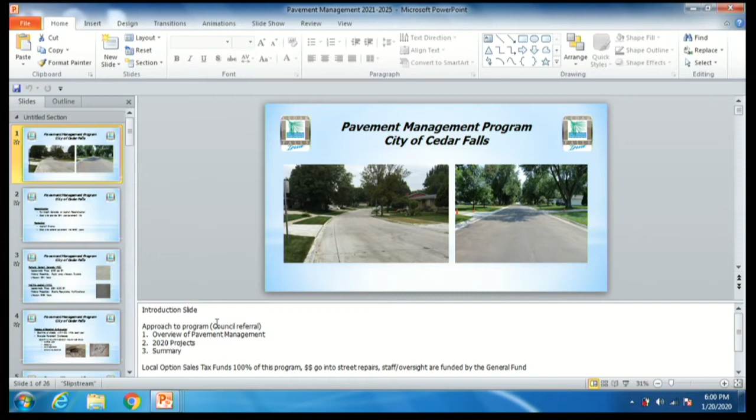I'm going to give a presentation on our city's pavement management program. I'll do the introduction, kind of a high-level overview of the program, and then later John's going to present more in detail our specific 2021 plan. So having said that, I'll jump right into it.

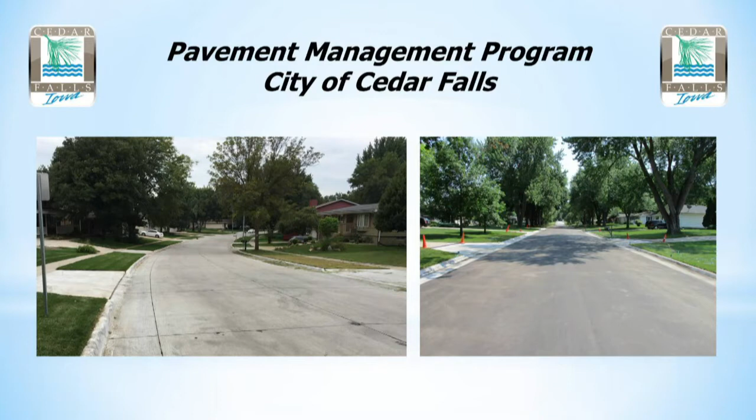Our pavement management program is a program that gets funded every year by our local option sales tax. So this is what our local option sales tax goes to: restoration of streets and complete street reconstruction. On that first slide, complete reconstruction means a complete reconstruction of either concrete pavement or complete asphalt pavement reconstruction.

We basically tear out the street due to age or deterioration. Most of these streets are in desperate need of major repair, and those will get a reconstruction of either concrete or asphalt, putting in a new pavement. That pavement design life is around 25 years for concrete, and for asphalt pavement it typically provides a new pavement life of between 15 and 20 years. The approximate cost per square yard for concrete pavement is around $130, and hot mix asphalt varies depending on the type of repair and the pavement section.

Let's see if I can advance this slide here onto the next.

That was the introductory slide, just the difference between reconstruction and restoration. A restoration is like a typical mill and overlay. We'll mill off the asphalt pavement and then overlay it with new asphalt, typically 3 inches, and that will extend the life of that existing pavement.

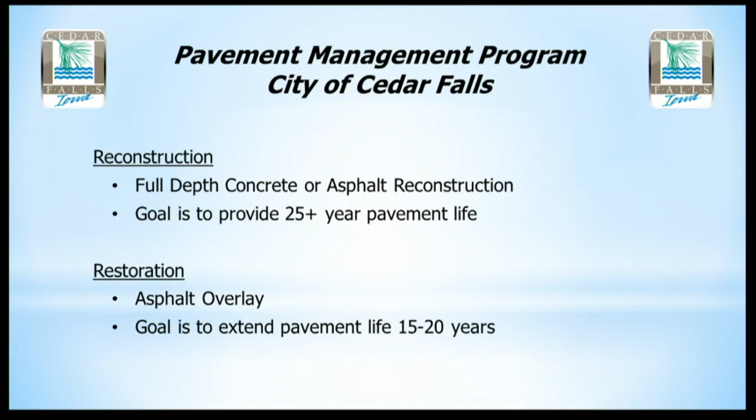We try to get 15 to 20 years out of that extended pavement life with a restoration project. The reconstruct is a new pavement, ripping out the existing pavement and putting in a new one, and hope to get 25 years of life out of that new pavement.

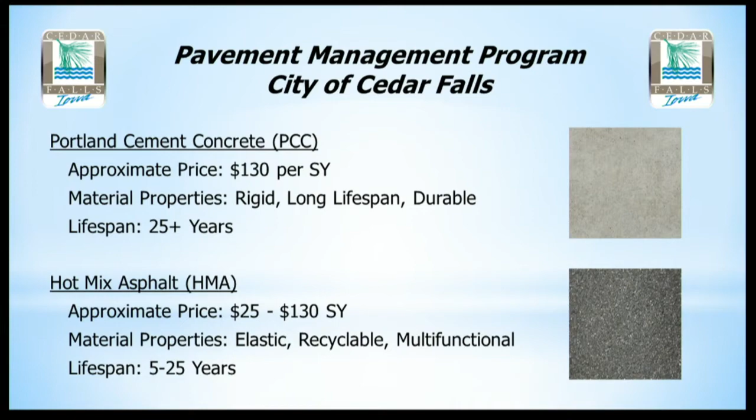I went through the cost, the difference between concrete pavement and asphalt pavement. So I'll jump into the next slide.

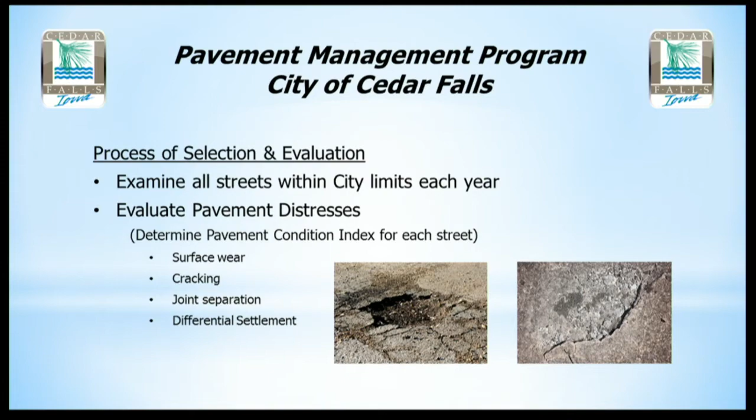Some of the things that we look for: every year staff goes out and drives the entire city, evaluates the pavements, and assigns a pavement condition index based on all the streets we drive. Then we prioritize rate of deterioration of these pavements and implement those based on critical needs. That's basically how we put it into our 5-year program. We put together a 5-year program based on our pavement evaluation, and we constantly update that every year because we go and drive the streets every year. It's a continuing process.

Some of the distresses that we typically see are fatigue cracking, wear, and busted panels in concrete pavement. Lots of times it could be anything underneath that pavement, maybe the subsoils are in poor shape, but there's a lot of reasons why over time pavement just wears out. It gets to the end of its design life, and we look at doing these types of repairs.

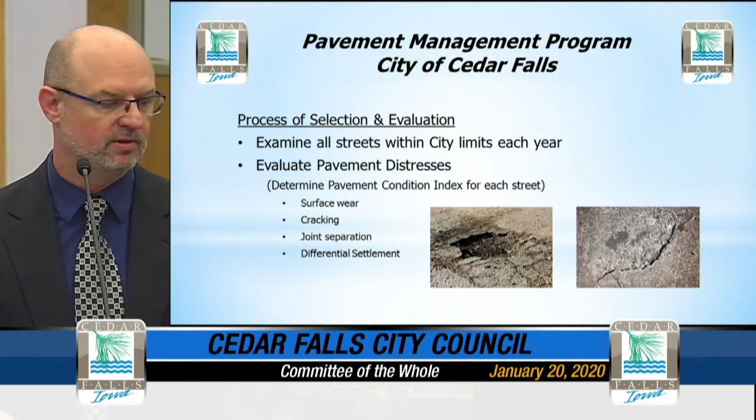Since 1991, when the local sales tax was implemented, we've done approximately 42 miles of street reconstruction, approximately 104 miles of restoration projects, and 4.2 miles of miscellaneous projects — perhaps some street intersection improvements and other things that wouldn't be a full street type of construction. So you can see since 1991 we've done a whole lot of projects, 150 miles worth of pavement improvement since the local sales option tax was implemented back in 1991.

So since 1991, we've gotten to the point now where we've almost come full circle. We've done a large portion of the streets in the city that needed either reconstruction or rehabilitation, and now we're getting back to that. We're at that 30-year mark, looking to go back and redo some of those streets again.

We do incorporate the Complete Streets program when we evaluate these streets. Part of that is we evaluate safety, trails, sidewalks, and other transportation use. These are all factors that we incorporate into our design when we put together the planning and design for these streets.

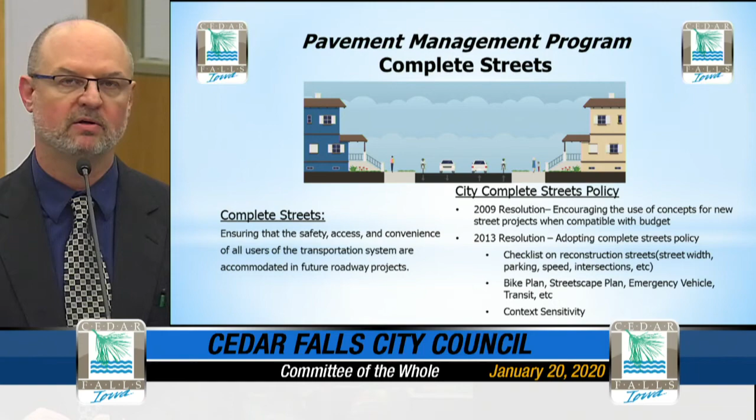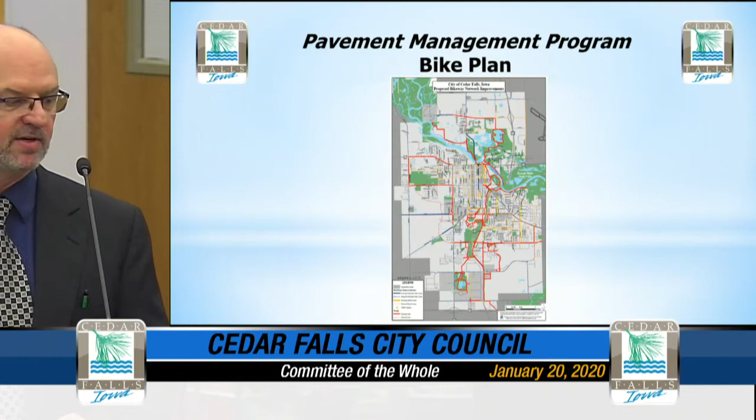That's a high-level general overview for our pavement management program, and John's going to get into more specifics for our 2021 plan, and then he'll touch on our ongoing 5-year plan. So with that, I will turn it over to John. Thank you for your time.

Thanks, Dave. So yeah, we'll move quickly through what is going to be the 2021 through 2025 plan. I'll spend a little more time on 2021, with 22 through 25 basically just listing off what is currently the intention to move forward on these streets. As Dave mentioned, we look at every street every year, and sometimes as we look 2, 3, 4 years out, those streets end up moving forward.

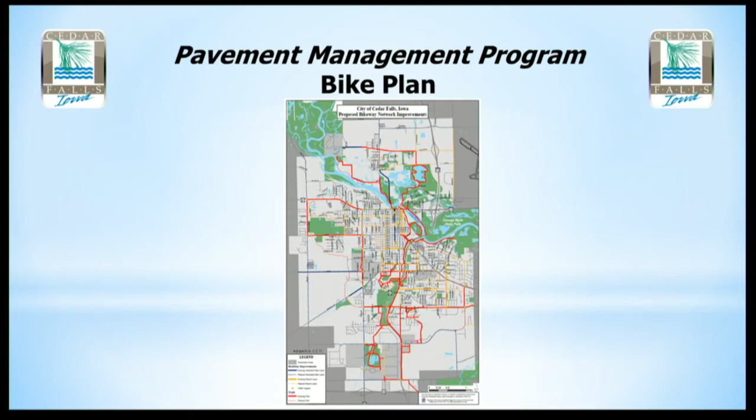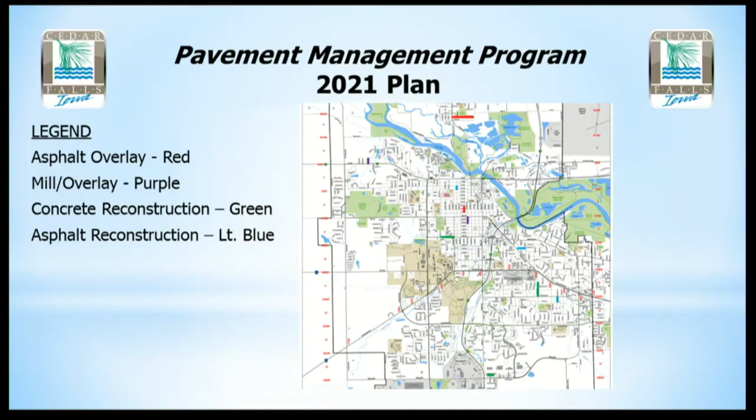So in 2021 for reconstruction, that's complete replacement of the street. We have West 18th Street from Campus to College, Brandilynn down the south side from the west cul-de-sac by Blain's to 750 feet east, and McLean Drive from Orchard to Maplewood.

In the asphalt section, those currently asphalt, we have Olive Street from 3rd to 6th, Madison Street from Bell to Victory, and Clearview from Primrose to Orchard.

With all of these streets, we work with Cedar Falls Utilities every year to determine if there's any current infrastructure that needs updating. We'll also note, as we go through future years, that some of these, including West 18th, McLean, and Olive, are all part of a multi-phased project, so we try to limit it to 2 blocks at a time.

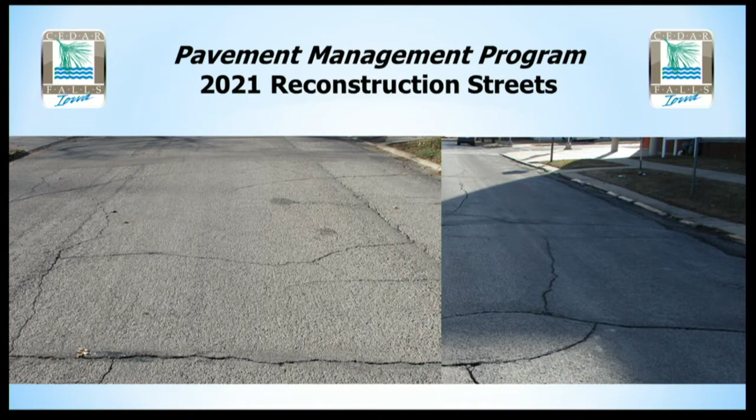West 18th Street, Campus to College, is part of a 3-phase project. The other 2 phases will come in '23 and '24. This is about a 35-foot wide roadway, and the last overlay was done in 2001. We currently have sidewalk on the south side of the road, and that's probably what we'll leave that street as - 35 foot with sidewalk on the south side. This section of roadway will get sharrows as part of the bike plan Dave previously talked about.

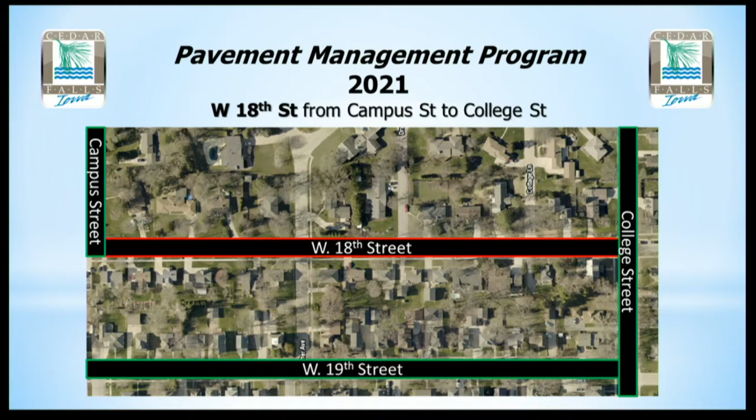Then moving on to Brandilynn. It's not a really old section of road, about 20 years old, but it's taken a lot of wear and tear through those 20 years with all the construction down in that area. Part of Andrea Drive was just reconstructed as part of the Highway 58 reconstruction. So with all the heavy volumes from Walmart, Menards, Blain's, et cetera, we're going to have to reconstruct that. We're past the ability to even do an overlay at this point, so that'll be a heavy section of concrete.

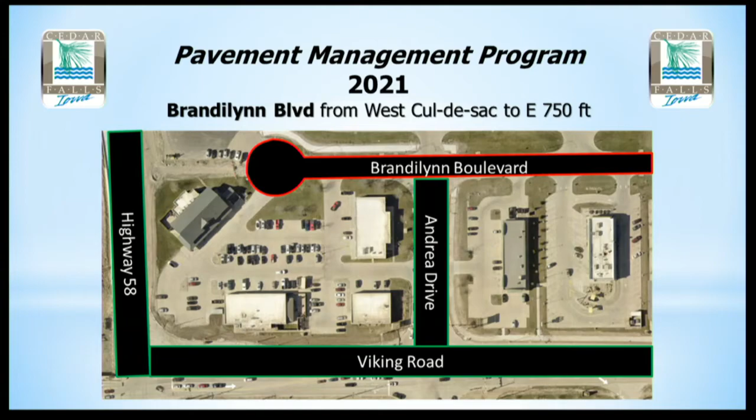Moving on to McLean, this is phase 1 of 2 with the next phase in 2023. I'm not going to repeat all the ages, but again this is another overlay done in 2000, and also in 1991 was Orchard to Lilac, and Lilac to Maplewood was actually an overlay in 2000. This currently has sidewalk on both the north and south sides, so we'll just be replacing the road as it is and look to add sharrows to this section.

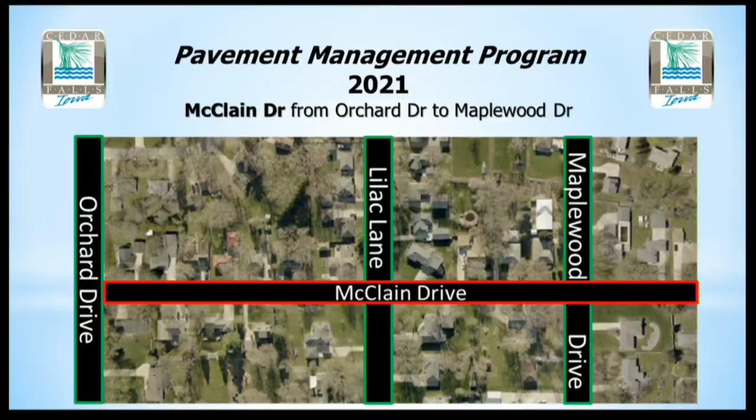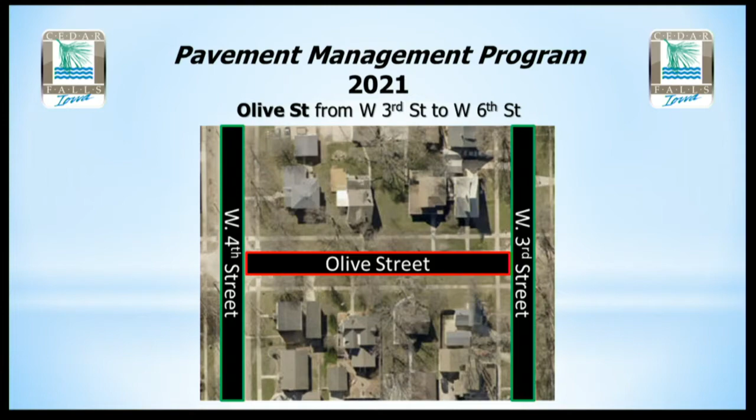Olive Street - this is phase 1 of 2, with a second phase scheduled for 2022. This asphalt overlay was done in 1993. This street has a fair amount of storm sewer infrastructure needs, so that's something we're going to be looking at closely, how we can improve some of that storm sewer.

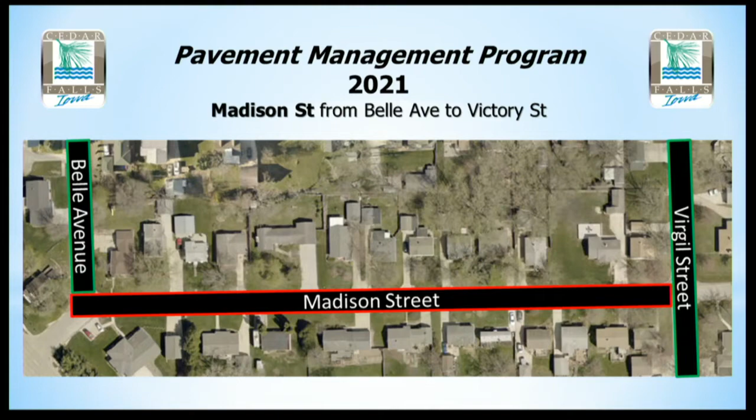Madison Street is a unique street in that it doesn't even have a standard crown in the road. It's a cross slope from one side to the other of upwards of 4%, and that overlay was done in 1993. No sidewalks currently, so that's something we would look at as part of our project next year, to add sidewalk or not - we look at that on every street project.

And then we have Clearview from Primrose to Orchard. This is a continuation from 2018 - we were to the south to Valley High Drive, and so again, older, quite an old street, 1991 overlay.

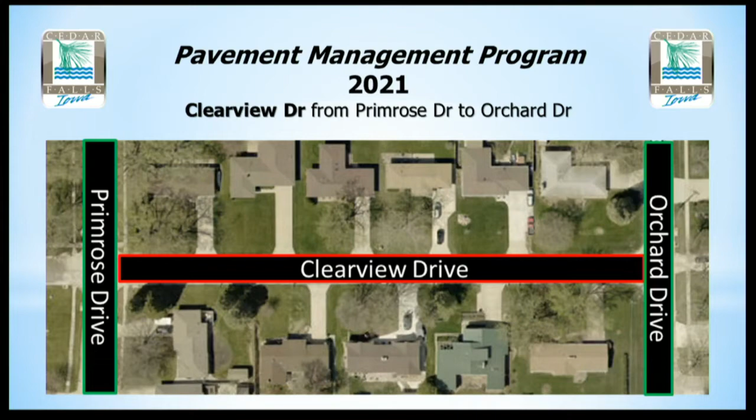Then we have our restoration streets for 2021: LeClaire Street from West 1st Street to Lakeshore Drive, Iowa Street 9th to 11th, Longview from Center to Central, and Tremont from 12th to 14th. Usually these include curb and gutter spot repairs and then either a mill and overlay or a straight 3 or 4 inch overlay. LeClaire on this section of road does not currently have a curb and gutter section, so that's something we will add in for stormwater conveyance.

So those are the main ones I wanted you to think about, because we are going to be looking for a motion to move forward with the 2021 design next year. Quickly going through 2022, these are the streets we're looking at doing.

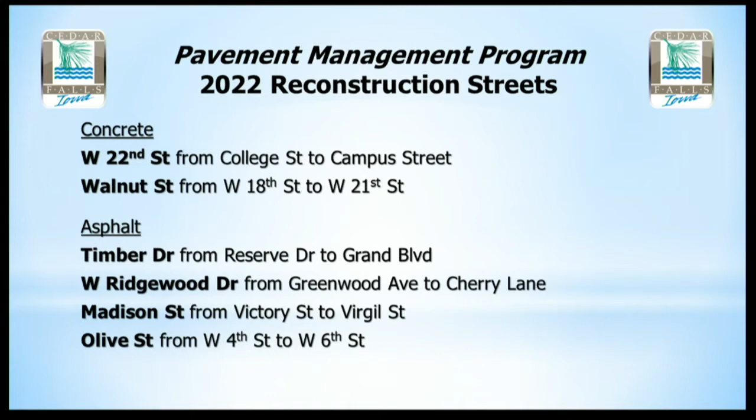Olive Street is a continuation, as I mentioned, from the 2021 project, but it's West 22nd Street, from College to Campus. We have Walnut Street, 18th to 21st, Timber Drive, West Ridgewood Drive, Madison Street, and Olive Street.

For 2022, the restoration is West 17th, College to Walnut, Pheasant Drive, Sandalwood Circle east 500 feet, Caspin Place, Terrace Drive, and Elmwood Avenue.

When we get back into reconstruction in 2023, you'll see West 18th Street, that's phase 2. We also have McClain Drive, the second phase, continuing up to University Avenue. Then we also have Summit Drive, East Ridgewood Drive, and Woodland Drive.

Restoration, a lot of different streets - these would be mostly overlays or mill and overlays. State Street, Pin Oak Drive, Nordic Drive, Hudson Road, Greenhill Road, and Veralta Drive.

2024 reconstruction - again, we're starting to get pushed out there a little ways. College Street, 9th to 12th, the last phase of West 18th out to Hudson Road. We have Lakeshore Drive, Greenwood Avenue, and Edwards Avenue.

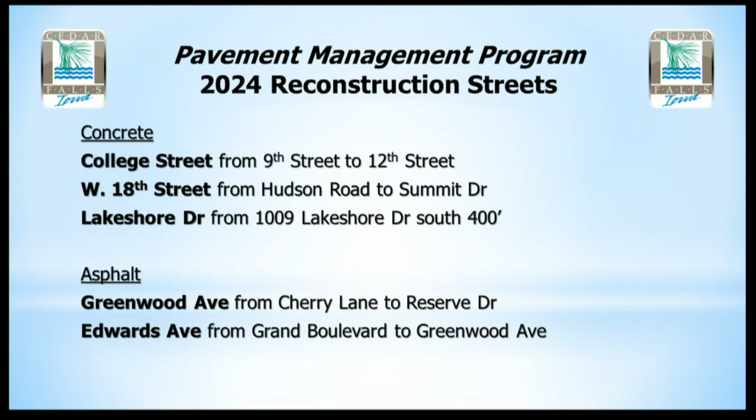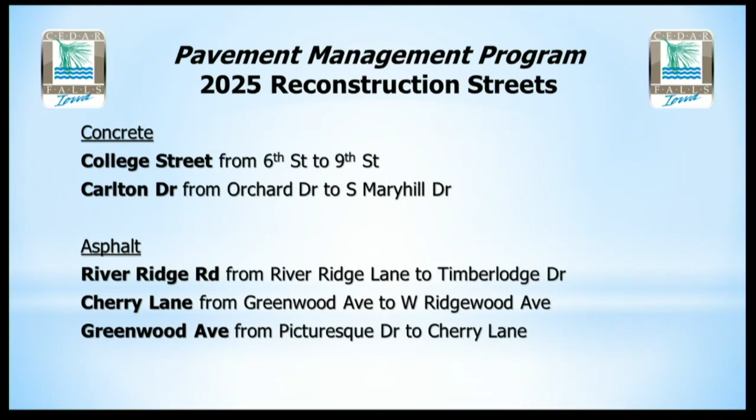And then we have restoration of West Viking Road, Lincoln Street, Ridgeway Avenue, and Murner Avenue. Then we get out to 2025: College Street, Carlton Drive, River Ridge Road, Cherry Lane, Greenwood Avenue, and finally restoration - Lincoln, Lone Tree Road, Cadillac Drive.

So you might have started to notice that the number of restoration streets is starting to go down, because we're doing more of the reconstruction, which costs quite a bit more money. So with that being said, as we discussed at the last meeting on October 21st, we would be looking for council approval to move forward with the 2021 final design for the streets mentioned. And we'll answer any questions.

Thank you. So this does require a motion. Is there a motion to approve? Second. I'll open it up for council questions. Okay, please?

I don't have a question on the 2021 - it would be more for some of the other components. So do you want to do this motion first, vote first, and then come back to the question? Or how do you want to do it? Well, we have to go through the discussion from council.

Okay, I was looking at Hudson Road - my understanding is that the 8th Street intersection has a higher amount of traffic, and because of that it throws the lighting out of sync. I wanted to see where we could look at a potential roundabout in the schedule - I know 2023 is a ways away, but time flies. Maybe footnote that and discuss it at some point - how do we handle a potential change instead of wasting the money on an overlay? Let's take the money for that intersection in particular and see what it would cost to do a roundabout there, knowing that traffic is heavier.

With that being, this next slide would kind of depict, doesn't change a whole lot, but this would depict with the yellow lines the 2-way with the 4-way stop at West 7th Street, as well as the stop signs at 12th. And then, of course, we have the stop sign at 18th.

When we start to look at these 2-way conversions, we are looking at what a lot of other communities are doing. Cedar Rapids, Des Moines, Dallas, Denver, Kansas City, all sorts of communities. I'm most familiar with the Cedar Rapids conversion.

The one-way streets, of course, at the time were put in to get a lot of traffic in and out of downtown as fast as possible. When the Highway 58 bypass essentially came along, that took away a lot of that traffic that used to come through the main street and the downtown. So what a lot of communities are trying to do now is not encourage people to come in and out of your community as quickly as possible, but make it more of a neighborhood feel and slow them down. That's kind of what we've been looking at, even with this last slide of the bump outs. That is a natural way to slow people down, and that's one of the reasons we're considering that.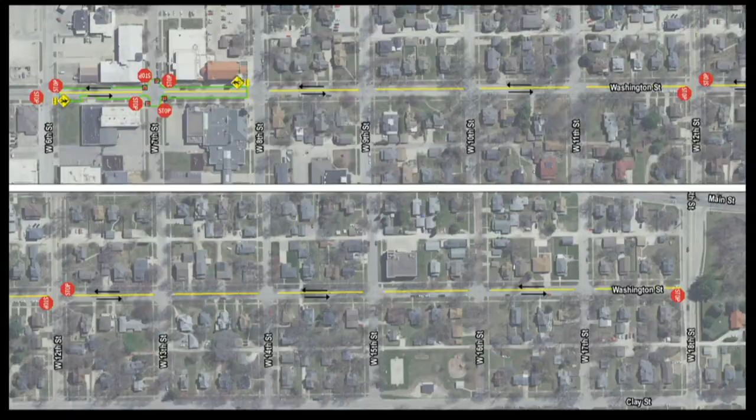So again, that's kind of where we're looking at for stop signs and the traffic control. There's a lot of traffic calming that goes with the 2-way, and that's why we have some of these as pros, and right now we have the one con. Now you may say there's certainly more cons than that, and some of those are perception.

But what we do know from studies is that 2-way streets are safer. 1-way streets correlate to decreased level of driver attention. It also typically brings higher speeds, and the one-way streets allow those higher speeds with fewer stops. The constricted feel makes people want to slow down and pay more attention. Pedestrians prefer crossing two-way streets as the drivers tend to travel more slowly and the vehicular conflicts are more predictable.

And we even heard it from at least one resident, it's more intuitive and less chance for driver error going up a one-way street, being that this is the last one in the downtown area. Two-way networks allow drivers to take the most direct route from their origin to the destination, as I mentioned, intuitive and easier to navigate. And then in talking to Public Works, the sanitation pickup is going to be much easier with the two-way conversion.

Now again, the cons - we haven't heard it from the churches, but there is currently church parking in the east lane, or the one southbound lane adjacent to the Catholic Church. What they do is shut that down, or there's signs up there from 3 p.m. Saturday till 1 p.m. Sunday that allow you to park adjacent to the curb, essentially reducing it down to one lane. So parking would not be allowed on that one side.

So what we are looking for is a motion on two things. One is to approve the final design of 6th Street to 8th Street on Washington, and then also to look to go from a one-way to a two-way from 6th Street to 18th Street.

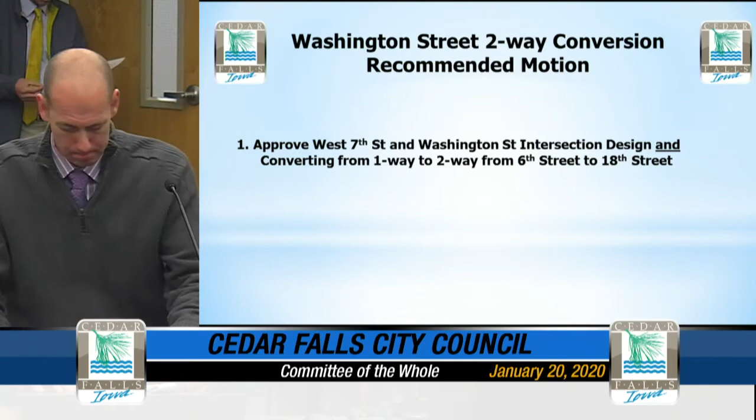Okay, thank you. I'll open it up for council for questions to staff.

And that's what the majority of the people I understand in that area that deal with that would like - they would like it to continue to be one way, at least by the schools, and have those lights there also, instead of just stop signs.

So I guess I'm not following the bus parking. When the buses pull up and drop off the kids, and then they sit there all day, the passing cars going the same direction will be on the other side, going that direction, just like they are today. Exactly like they are today.

That's what I'm saying, I'd like to see it kept the way it is, at least by the school and the next block, because then you have traffic lights to control, not just stop signs. And the most important thing is to protect these kids when they're getting in and out of school. I'm not sure how the one-way versus two-way - well, if you pull buses over to the side and then have two-way traffic next to them, now you have 3 sets of cars on that street, just like you have today. It'd be just like you have today.

Well, it seems that there's definitely some concerns over this with St. Patrick's School, and there was a very well laid out email. I'm just wondering, have you met with St. Patrick's School? Have we spent time investigating, making sure, seeing their side?